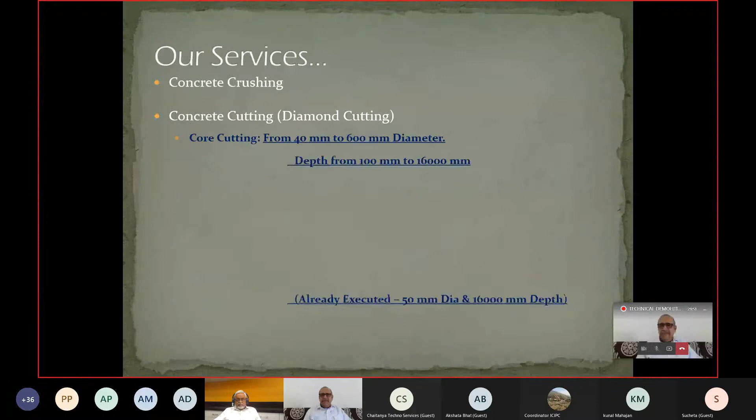Previously, when we required anything to be broken, generally we used hammers and chisels and all these things. Then afterwards, some innovations came, and then we started with the breakers.

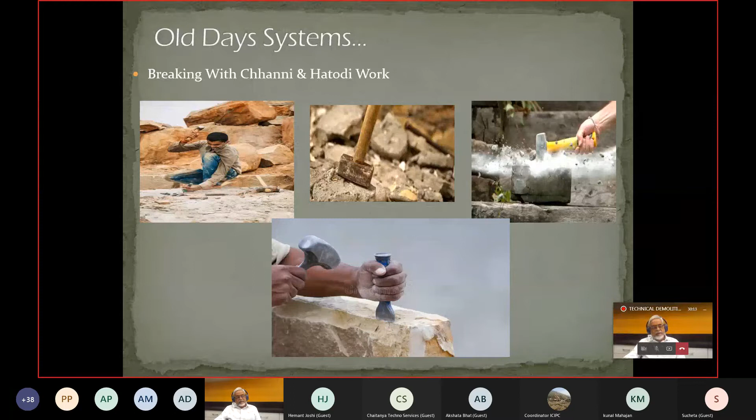After that, there are two types of breakers: one is pneumatic and one is electrical. The pneumatic breaker is mainly used for rock breaking, but generally we also use pneumatic breakers for concrete breaking. However, it is not advisable to use pneumatic breakers because the intensity of the stroke is too high, and that may give cracks or damage to the concrete. So we recommend using electrical breakers because the intensity is low and the number of strokes are more. That's why we get good output also, and there is no harm to the structure remaining.

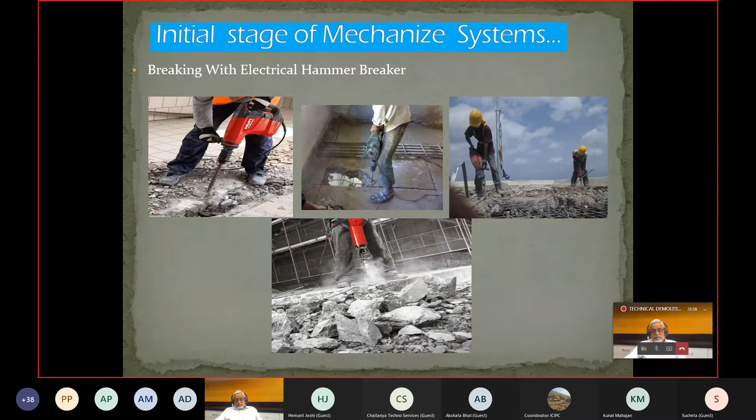Then comes core cutting, where we use it for AC and other installations. Previously, for slab removal, we used to do stitch drilling and remove the slab and other things that way.

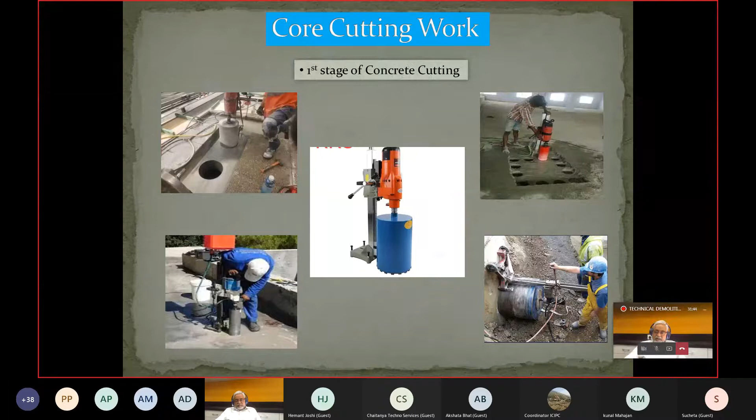Then comes the saws - electrical saws, diamond cutting - where sintered diamond tips are used for concrete cutting.

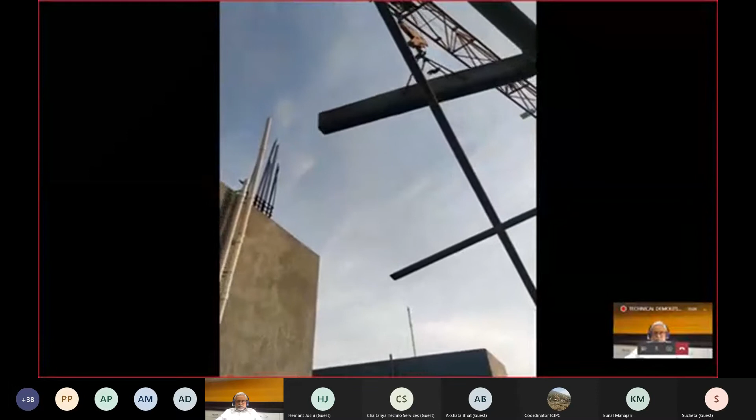The blades have a limitation on the depth and thickness to be cut. Afterwards comes the stage of wire cutting, where there is no limitation of thickness or length to be cut.

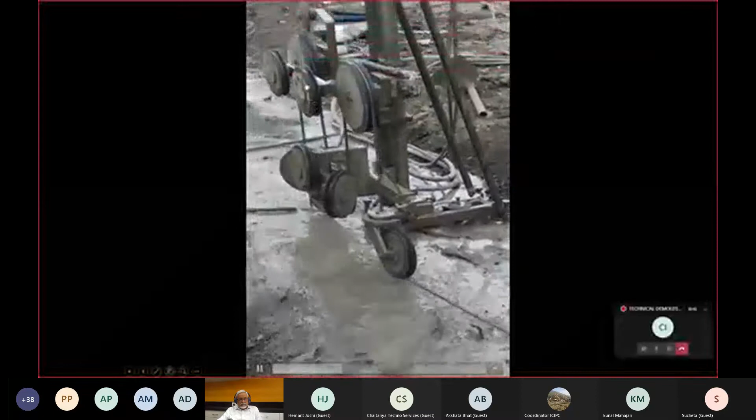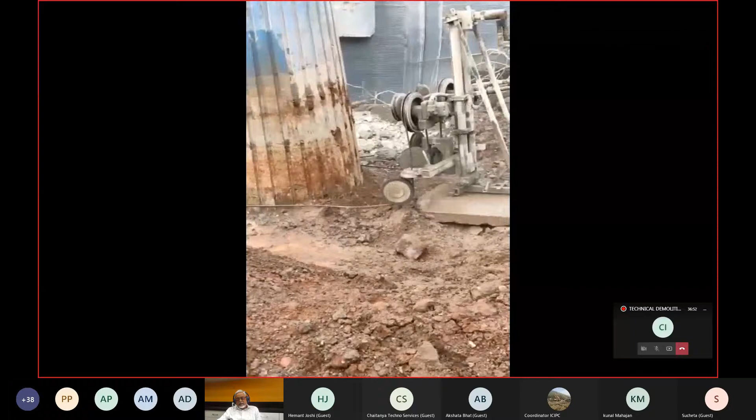In our university bridge project, we have cut piers, which we are showing you.

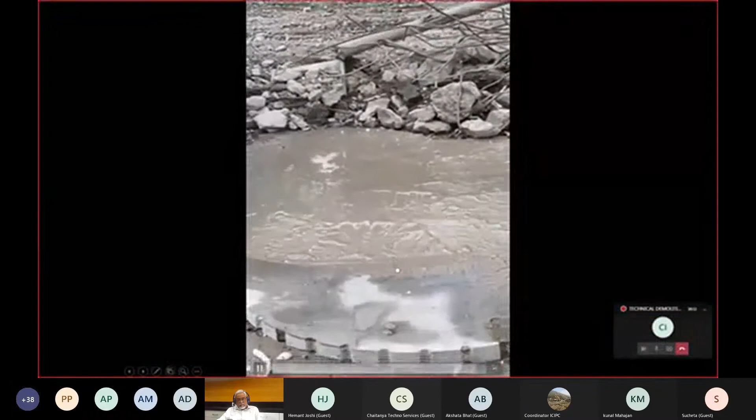You can see the bars, rebars, being cut.

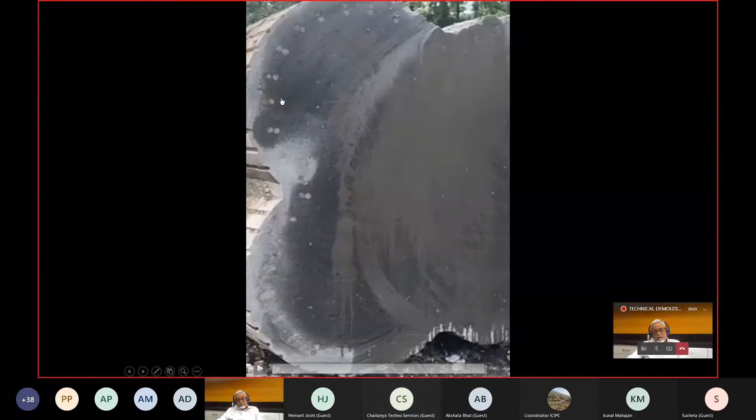Then comes, after wire sawing, if you want to remove some chunk from a big chunk, the system used is plunge sawing.

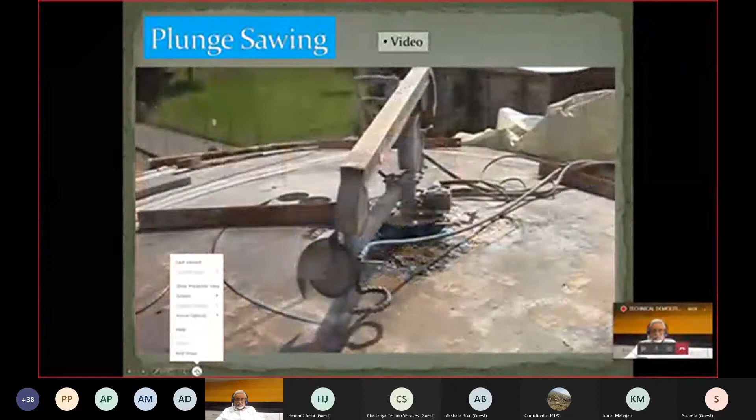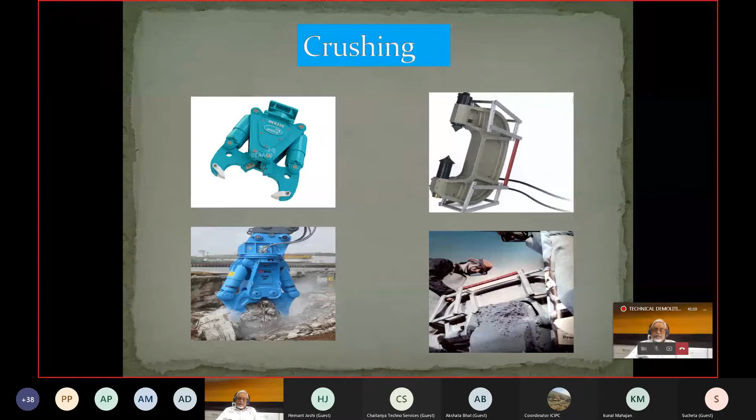Then wherever the cutting and handling of pieces is not possible, the system used is crushing. There are two types of crushers available: one is handheld and one is machine mounted. We have used these for crushing in our university bridge project, and you can see the handheld crusher working in the video also. This is a handheld crusher.